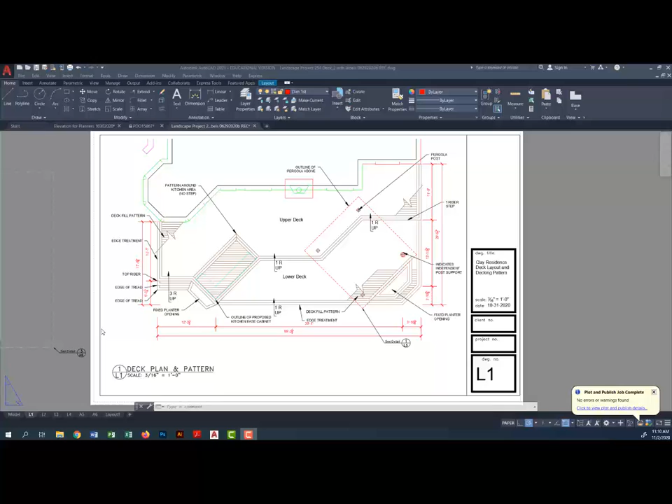So once I've done my sketch design and got all that information together, I'm ready to apply it into my CAD drawing. Here are my basic drawings, L1 and L2, and what I'm going to move to from there is my L3 drawing.

First I have to prep the drawing so I can work on the pergola. I'm going to turn off some of the layers I don't need. For instance, I don't need this grid displayed anymore, so I'll turn off that layer, the design grid.

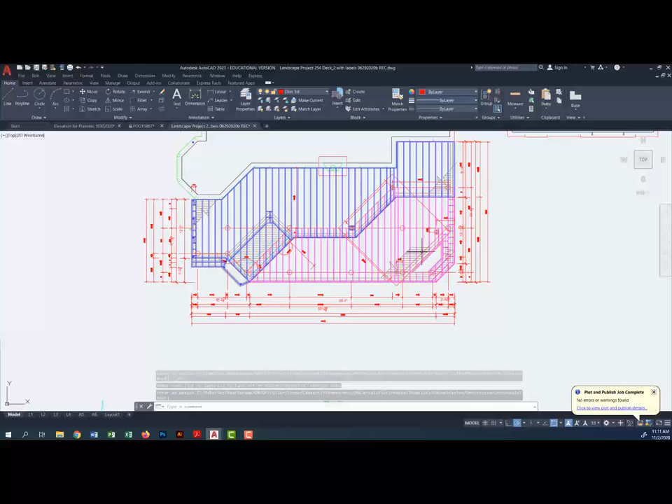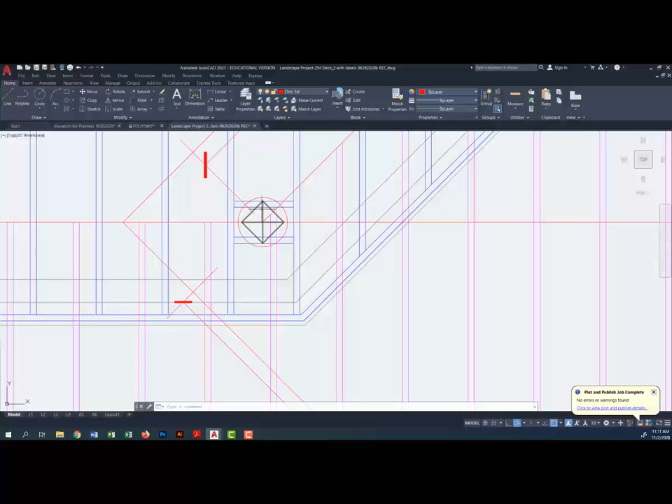I only need to copy the essential ingredients to draw the rest of the imagery. I've already got in this drawing all the extra framing I'll need to provide lateral support to the posts. In a lot of cases it's just doubling up on the joists, or like in this one, adding blocking. For this blocking I'm going to notch out the post and put the blocking in so I get a nice solid area to secure it to the post, and that's okay to do.

Here I'm going to turn off some of the deck details and framing details because I don't need them in the next section. I just select the line and remove the color. I don't need any of this extra information here, so I'll remove the patterns as well, the upper deck and lower deck pattern.

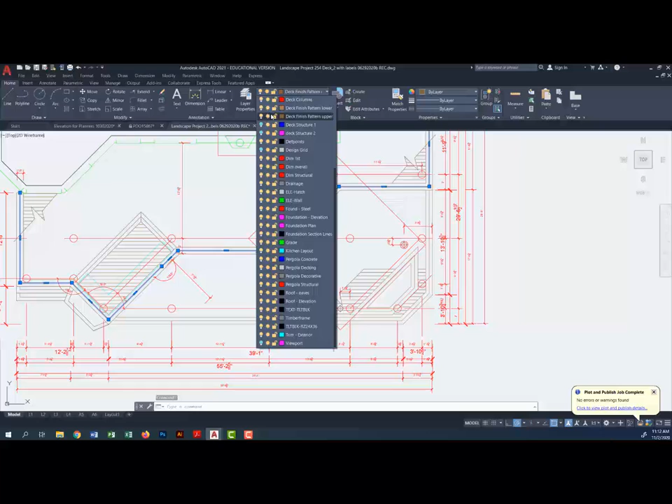I don't need some of these extra bits of dimensions right now, so I'm going to remove them as well. Some of them I will keep, and I'm going to work with what I have here.

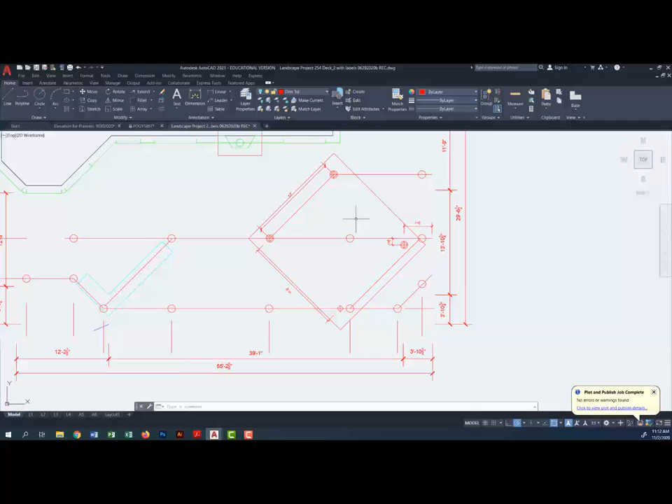I can create a separate layer depending on the scale I want to work with, so let me copy and paste that over. I'll select the area I want to copy - it's going to pick up some extra bits, that's okay - and then move that over.

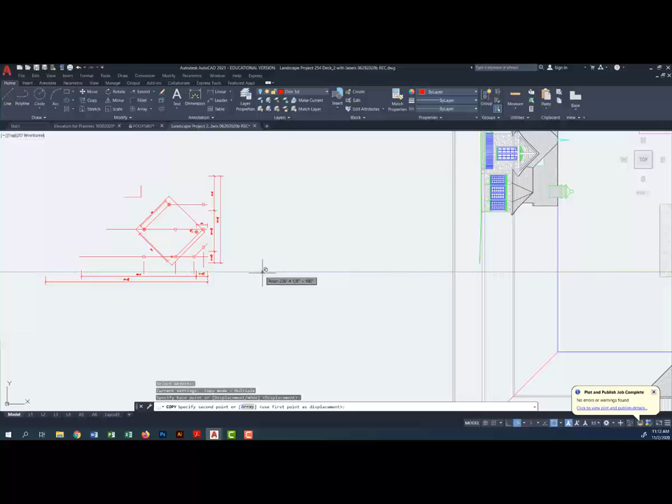I'll try to keep that horizontally level, so I can press F8 here. There we go. Some of the extra stuff I don't need, like these dimensions I have here.

I'm not going to need these, but I'll leave them for now because I may have to dimension to them. I don't need any of this extra bit of information right now - it's always easy to add dimensions afterwards, so that's not a problem.

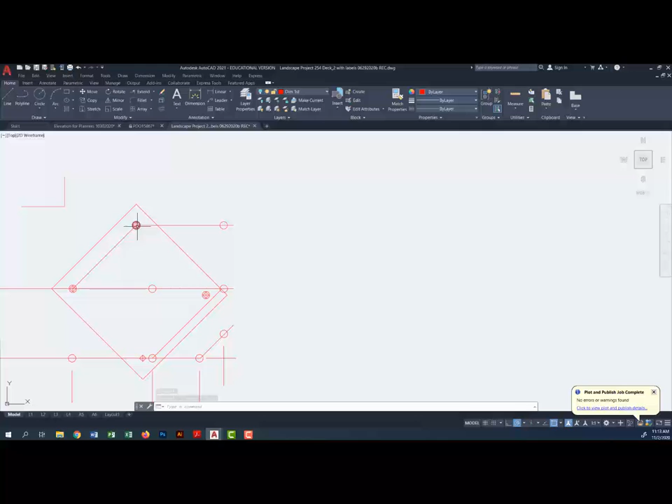These are going to be in the wrong direction if I leave them where they are. So that's basically my existing beams, my existing columns, and then my 4 posts. Notice I showed the posts differently, just so I'm aware of that when looking at this image.

Now, I don't want to work on an angle. I drew it on an angle on my deck design to do something a bit more creative, but I don't want to draw elevations on an angle in any of my details. So the first thing I'm going to do is rotate this whole image.

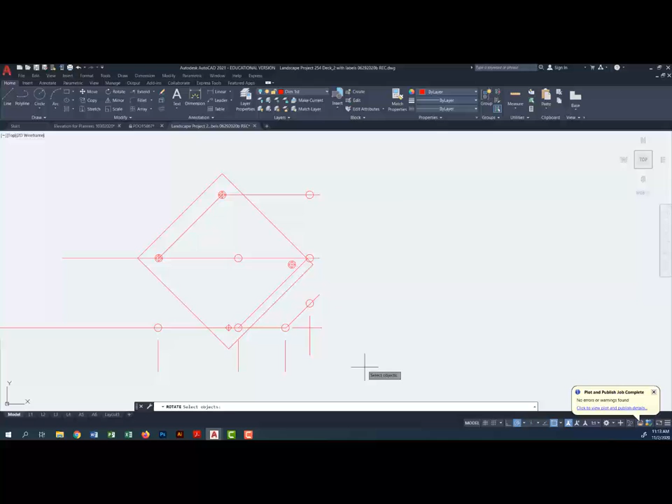It doesn't matter where I rotate it around. I'm going to pick 45 - that will be one of the views I'm going to work with. And then I'll copy that over.

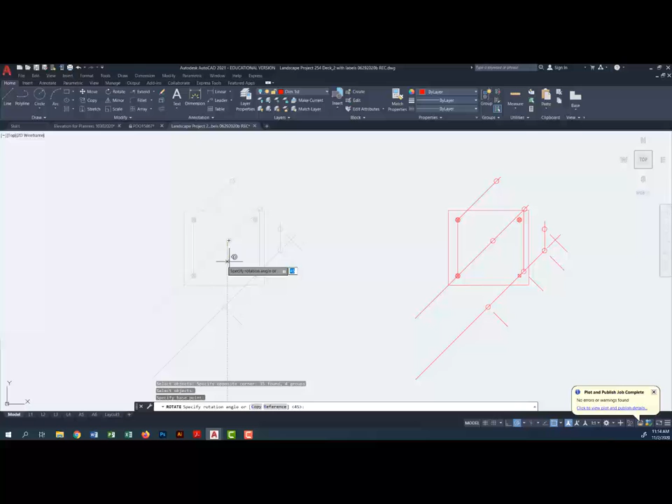And I'll rotate it in the other direction. I want it to be in that direction there.

There we go. You'll notice that the line type scale isn't being shown here because I'm in model space instead of paper space. But from here I can start working.

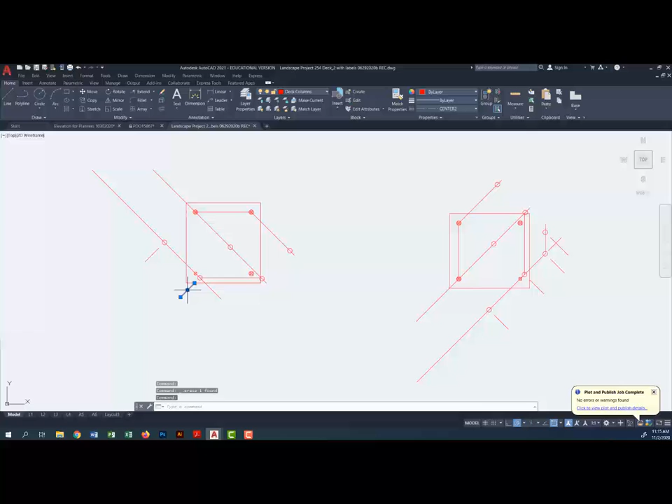What do I need? What don't I need? Well, I really don't need these two posts because they're not going to play a role here. I'm going to add some extra line work later on. I don't need these, and I don't need this, this, and this, because that refers to the original structure. This is what I'm going to be working with throughout the project.

So now I'm ready to move towards the elevations.